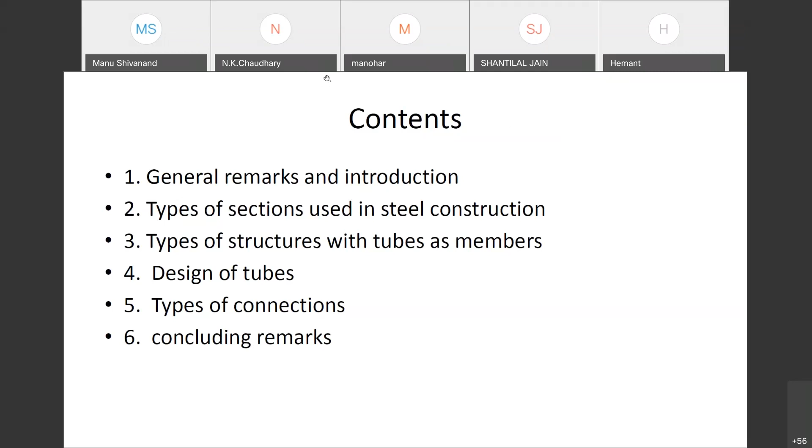In the general remarks and introduction, I have considered three subtopics: general remarks, materials of construction, and advantages and disadvantages of steel construction in tubes.

When I studied structural engineering as an undergraduate student 50 years back, we had one subject of structural design, which included steel design, RCC design, and occasionally prestressed concrete. Many of my colleagues in colleges used to keep steel design as optional, with only the submission work somehow managed, and very few studied it for the exam. That was a time when people considered steel design very difficult.

Not only that, it had very limited applications, mainly industrial sheds and similar structures. Otherwise, for most buildings, auditoriums, halls, and so on, nobody generally thought of using steel.

Steel was always considered a common area for mechanical engineers and structural civil engineers. Many times, even mechanical engineers used to do steel design and get away with normal design, while civil engineers would generally restrict themselves to concrete. Now things have changed, and mechanical engineers are almost driven out of general steel design. It is primarily the job of structural engineers with a civil background to undertake design work, whether concrete or steel construction.

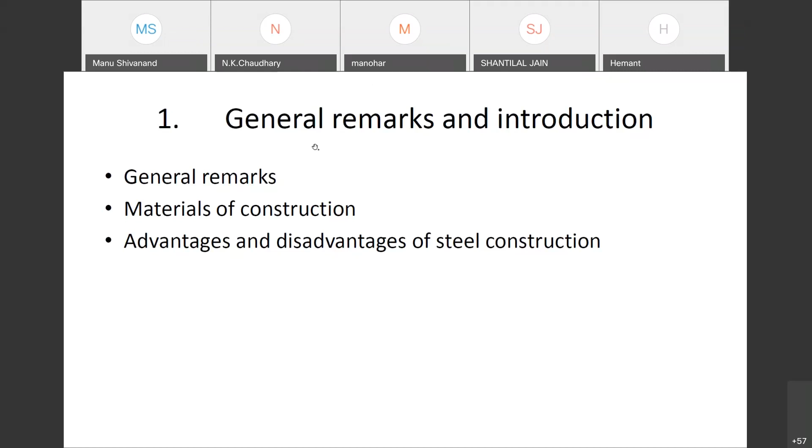Under general remarks, as far as steel sections and tube sections are concerned, they are excellent members for resisting both axial force and moment. Other types of sections are also available, like angles, channels, or tubes, but each section has its own problem. As far as tubes are concerned, their original strength is excellent and very efficient in carrying axial force as well as bending moment.

Secondly, there is a chance you can connect a member to another member, both of tubes, with direct welding possible. For other types of sections, like connecting an angle to another angle, it is very difficult to directly connect because of the legs—some legs might come in contact with the other section, but some might remain free, making the connection extremely difficult. Member-to-member connection is very difficult for other types of sections, while for tubes it is an excellent option because you can directly get enough area of contact between the two tubes to be connected.

Further, if you are using round tubes, they have a very low drag coefficient, so the wind load gets reduced as far as the member exposed area is concerned. And if it is in water or current, like a column in a creek or river, it has an excellent, very low drag coefficient, so the lateral force by wind or water current gets reduced. We see it has quite a few advantages over conventional members, either built-up members or conventional hot rolled sections.

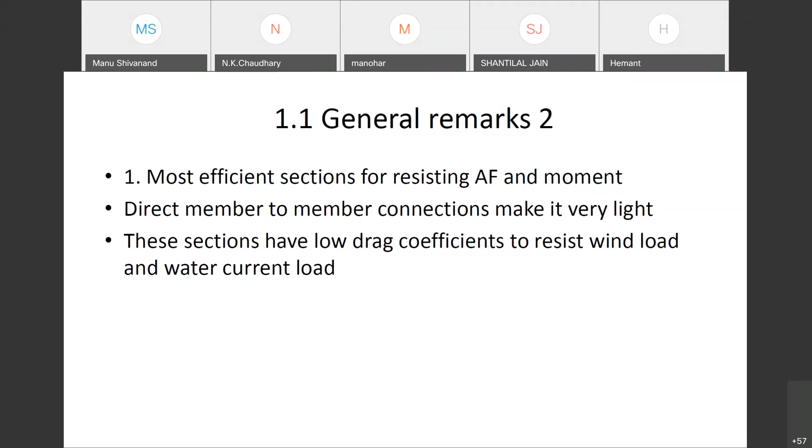Now for materials, there are various grades in steel itself. We generally have these three grades, but other higher grades are also available: YST 210 with a yield strength of 210 MPa and ultimate strength of 310. If you go for YST 240, higher properties are available. YST 310, still higher properties. You have further YST 350 or YST 460, higher grades of steel available.

We see that as you go on going for higher and higher strength materials, the capacity of the member to carry load drastically increases, and that makes the structure lighter and lighter. I think go for next.

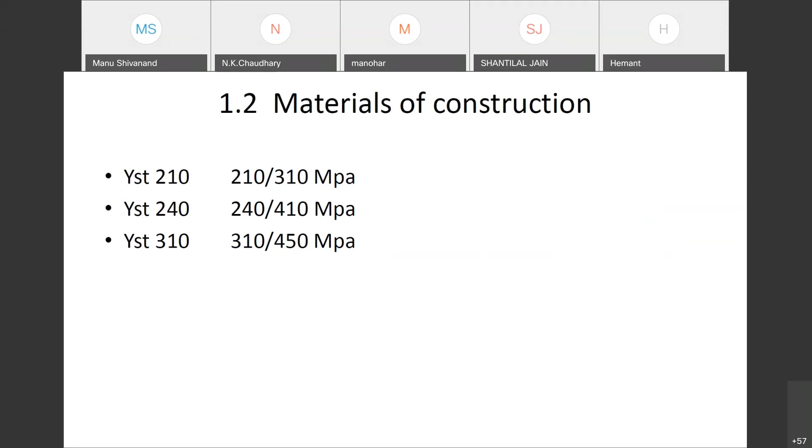Now, the basic advantage of tubular construction, using tube as a structural member, is that for such members the self-weight is extremely low compared to any other section, whether it is an I section, channel section, or built-up section. This section has a very large load carrying capacity for the same area, and as a result its self-weight gets considerably reduced compared to the same structure made up of other types of sections.

Secondly, it has excellent torsional resistance. For many open web sections, like an I section, channel section, or angle section, the torsional property is very low. They are very weak torsionally. If you have a structure where a member develops torsional moment, you have no option but to go for these closed tubes, either rectangular, square, or circular. So if there is any problem associated with torsion, you have to use tubular sections for resisting the forces there.

As far as other types of forces are concerned, most of the time the structural member, after carrying out analysis, might develop some axial force and some bending moment. If that bending moment is in one axis only, uniaxial moment, then either an I section or a channel section can be used.

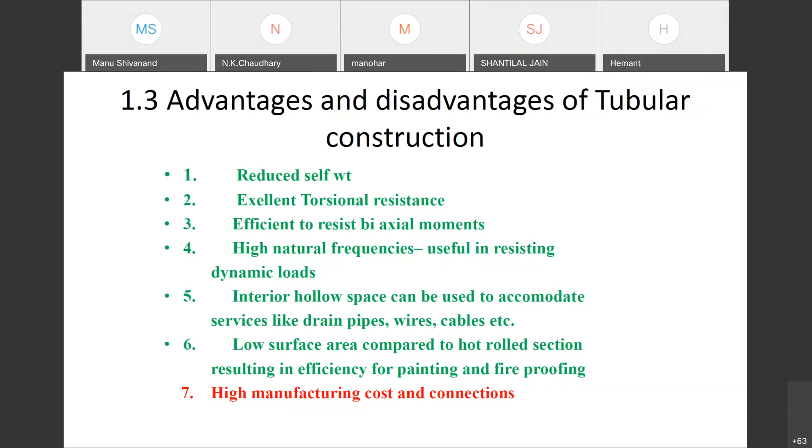Now, after having considered these general comments, let us go to the next slides.

Now I am considering the types of sections used in steel construction. With reinforced concrete, we have got a section which is made depending on the architectural requirements and so on, while for steel sections, many options are available. You have got so many types of sections. So I always find junior designers having their first query about which section to use, because he only knows that the axial force or bending moment is so and so, but shall I use a channel section, or an I section, or a tube section? There is always a free choice.

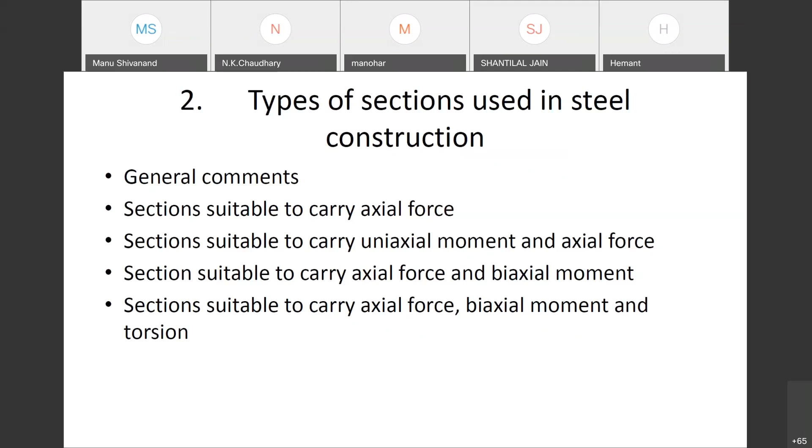So many times junior engineers or newcomers are puzzled about which section to use. We have to check carefully which section has which plus points and so on. We shall now see which sections are suitable for carrying axial force, those suitable for uniaxial moment and axial force, those that can efficiently carry axial force and biaxial moment, and sections that can carry axial force, biaxial moment, and torsion - whether a section is ideally suited for such demands or not.

So now we see that the sections available are vast in number. There are various sizes and thicknesses available. We have got an I section, a channel section, the T section, the angle section, equal or unequal. Then we have sections with bulb type projections. We have round tubes, square or rectangular tubes, and plain plates available directly for making any section through welding and so on.

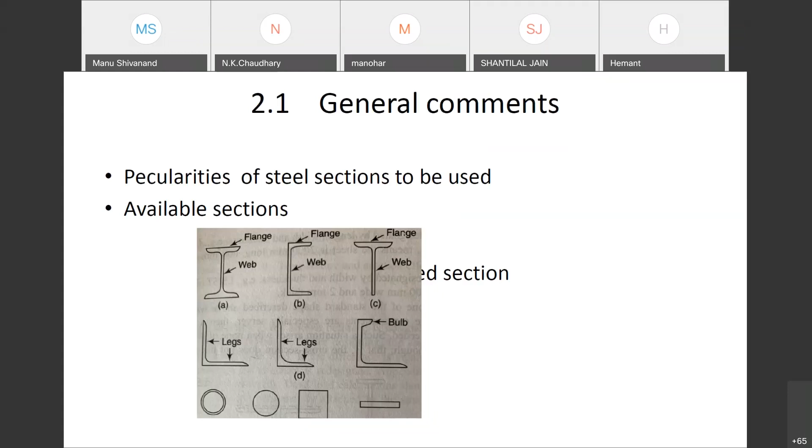Now we have also got built-up sections. That is, in addition to what you get in hot rolled, you can add plates to it and see whether your demand is met. Then we have cold formed sections, which are very thin sections. They are also used in many applications with the obvious advantages of lightweight and so on. So these various options are available, and one has to judiciously select a section and see whether it meets the requirement or not.

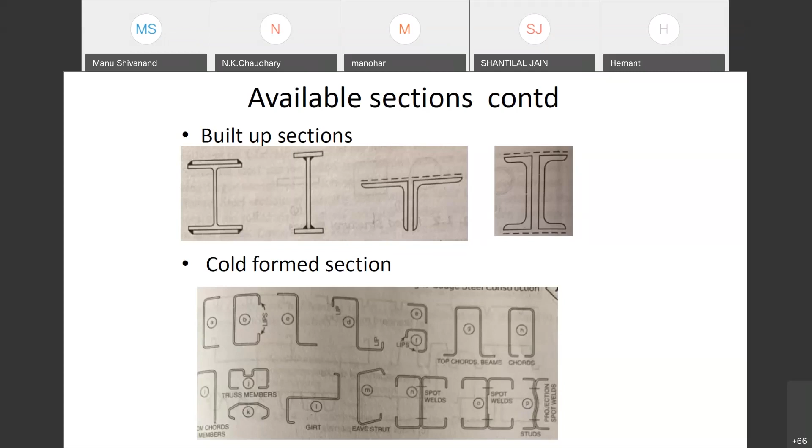Now, when you consider a member expected to carry only axial force, like in trusses, we see that angle sections are an option. You can use single angle or double angle, or a channel section, which is also strong or efficient enough to carry axial force. We have an I section or H section, but it is difficult to connect them in a truss, so generally they are not used unless you can think of suitable connections. Round and rectangular tubes are also used for making trusses. So if members primarily carry axial force, all these options can be considered, but each time you have to see what kind of connection you can think of.

As far as angle section is concerned, it has about 2 legs. The result is, if you connect an angle to a gusset plate with only one leg connected, it becomes more inefficient, because its load carrying capacity gets reduced due to the eccentric connection. So each time you think of a connection, it immediately puts a bar on the load carrying capacity of the members.

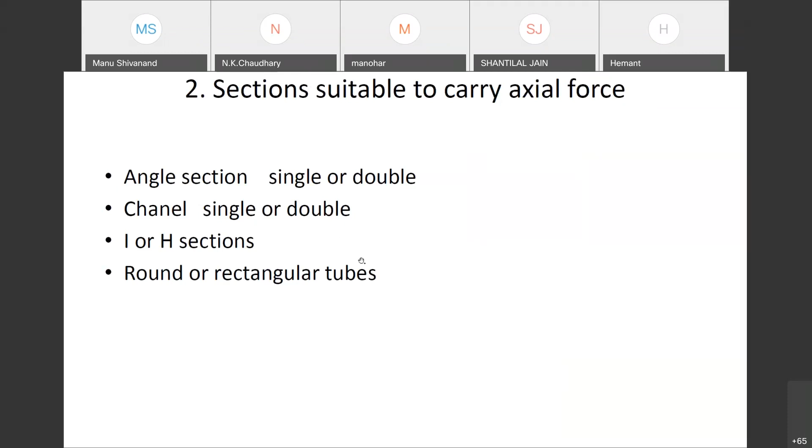Now if you consider a structure where members carry axial force and uniaxial moment, like a plane frame, you can use a channel section, either single or double built-up sections, or I sections because they have excellent moment of inertia about one axis, or round, rectangular, or square tubes, which are also good in resisting axial force as well as bending moment.

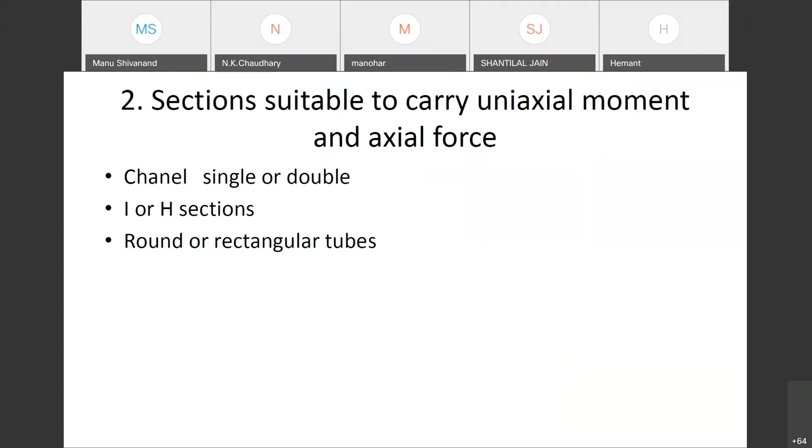If you have a three-dimensional structure where members carry axial force and biaxial moment, you can go for I sections or H sections, which have reasonably comparable properties for bending about both axes, or round, rectangular, or square tubes - they are also ideally suited. So for a structure where members develop axial force and biaxial moment, you need to consider only two options: either an I or H section, or a round or rectangular tube, or built-up sections in these shapes. You can even go for channels built up, so that there are enough properties in both directions, and these sections can also be preferred.

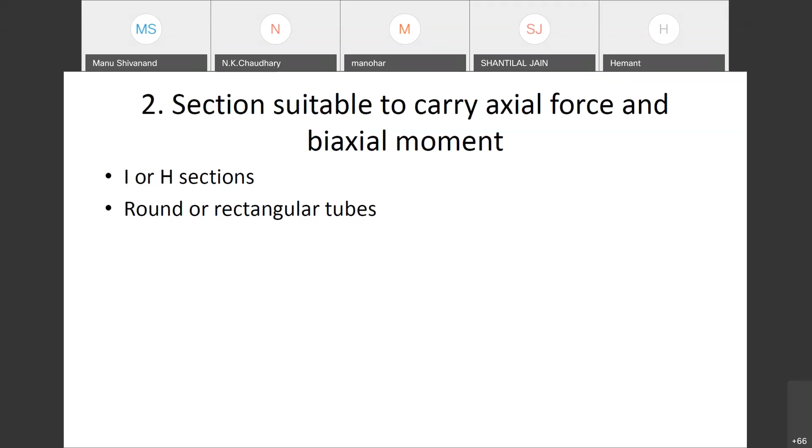Well, if you have a structure where the members develop axial force, biaxial moment, and torsion, then the only choice is to go for either a round tube or a rectangular or square tube. Because when you are to deal with torsion, open sections like an I-section, channel, or built-up sections are out of question. An angle is out of question because it doesn't have enough torsional strength at all. It is very feeble for torsional resistance and so on.

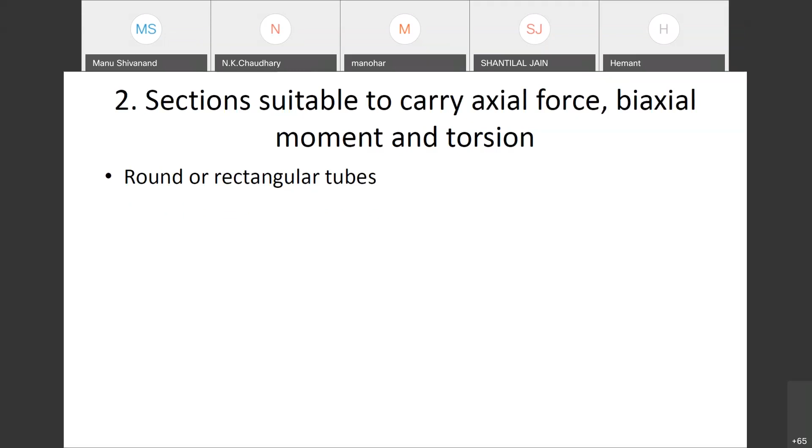Now, when we consider all these plus and minus points, let us now consider the applications where you can directly select a tube as a primary member and plan the structure accordingly, with suitable connectors. The first type of structure that comes to mind is a space frame with either a 2-layer or 3-layer space frame with ball connectors, plate connectors, or special connectors.

In a space frame type structure, the primary members are carrying only axial load, and in that case you can definitely use ball connectors or plate connectors. Then you have large span trusses, where again you can consider using tubes but with connectors which are specially designed or specially made.

Then you have spherical domes or pyramidal structures, or supporting structures for fabric roofs. For a fabric roof you need a massive structural system on which the fabric is laid, and the supporting structure has to carry all the wind load effects coming from the fabric. Many stadia, or structures now seen at toll plazas, have fabric roofs provided in a large way, and there the supporting structure is many times made up of either round tubes, square tubes, or rectangular tubes.

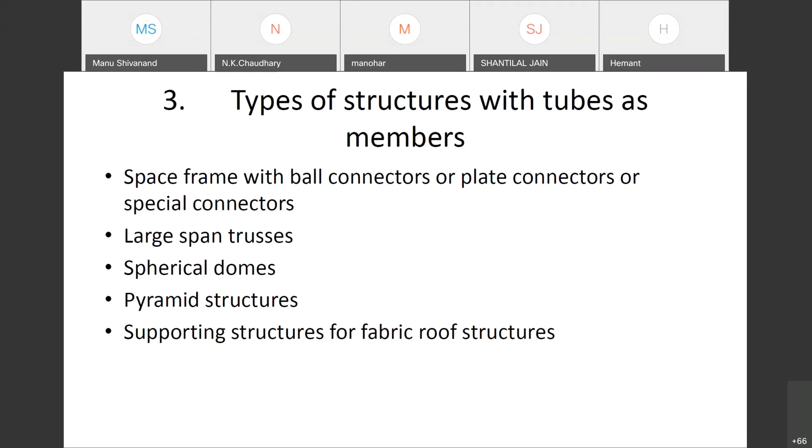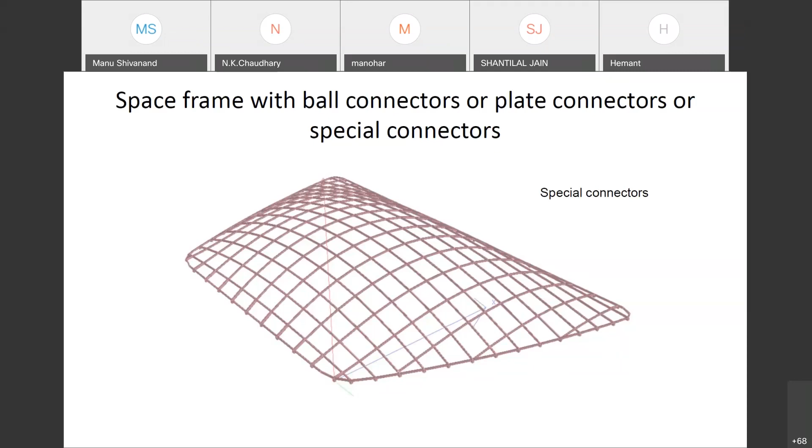Here particularly we have used cylindrical connectors. With this toll plaza type structure, which is a double layer space frame, we generally use ball connectors because these members primarily carry axial force, and for axial force you need only a simple connector where a single bolt is used to transfer forces from one member to the other through the joint.

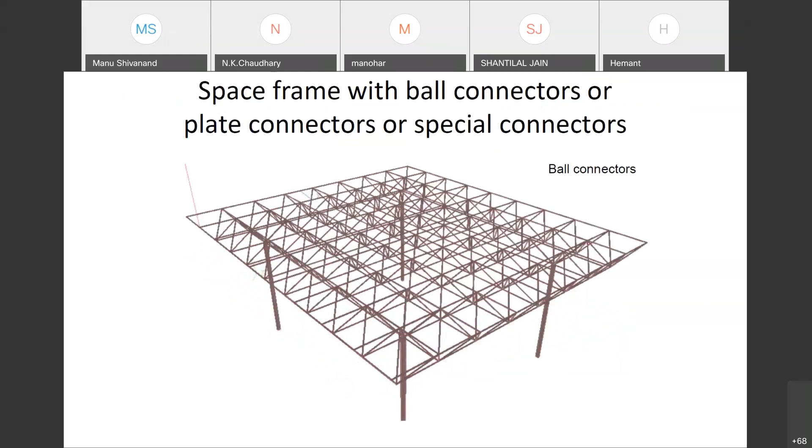Now this is a space frame again, but with plate connectors. Instead of going for ball connectors, because a ball connector needs special secondary hardware and the balls have to be specially made with a lot of accuracy, the other option is to go for plate connectors, where the tubes are crimped at the ends and the connection is made to a plate connector through bolts. So the bolts in this case are in shear, while in the earlier option with ball connectors, the bolts are either in tension or compression.

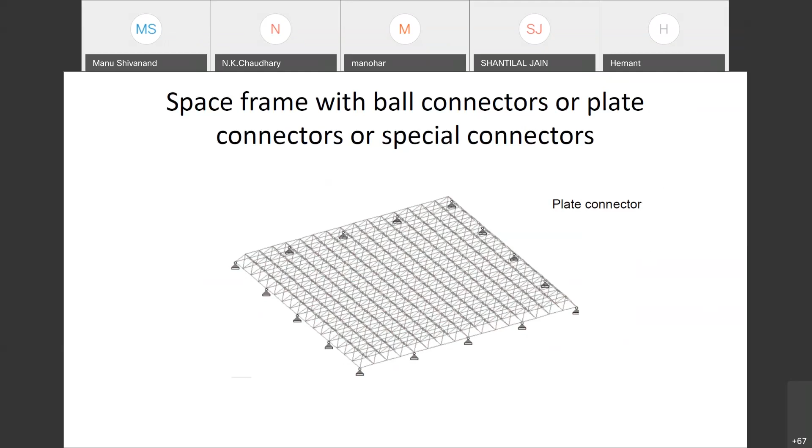This is one dome structure of about 17-meter diameter that was designed, where again we have used ball connectors for its connections. The dome has the property that most of the members carry only axial force, as a result of which ball connectors are ideally suited for connecting members at the joints. Such geometry can be easily conceived and implemented by properly drilling the holes at the node at specific angles, and accordingly connections are made.

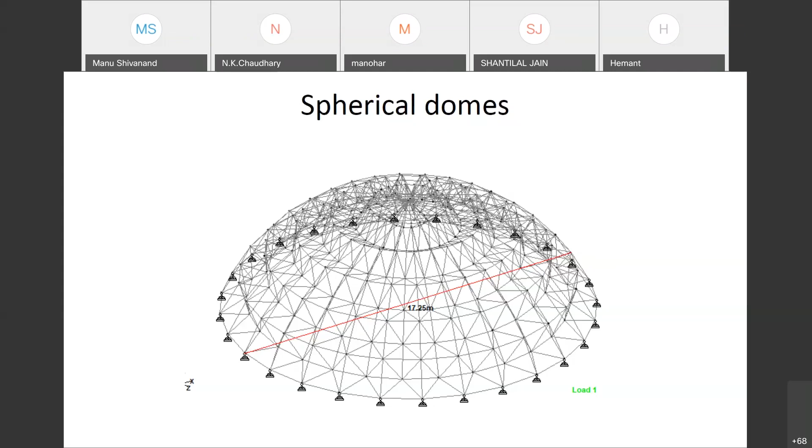This is again a pyramid type structure where tubes are used, but here instead of using ball connectors or plate connectors, direct welding was done for member to member, and accordingly the entire structure was made by only welding member to member connections. So all the members are tubes with required thickness and so on.

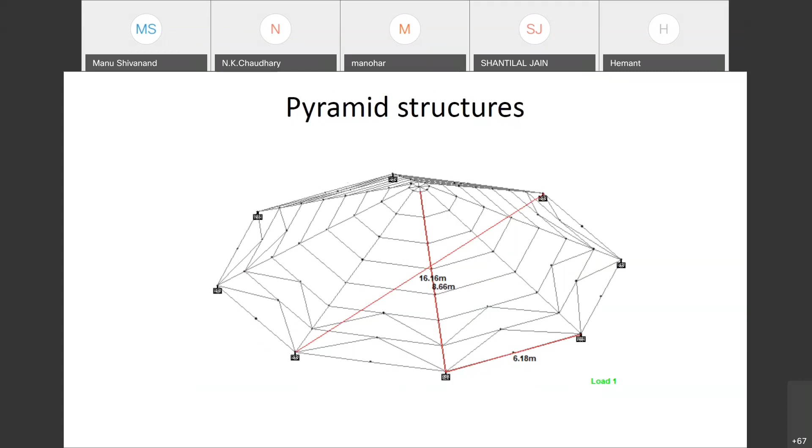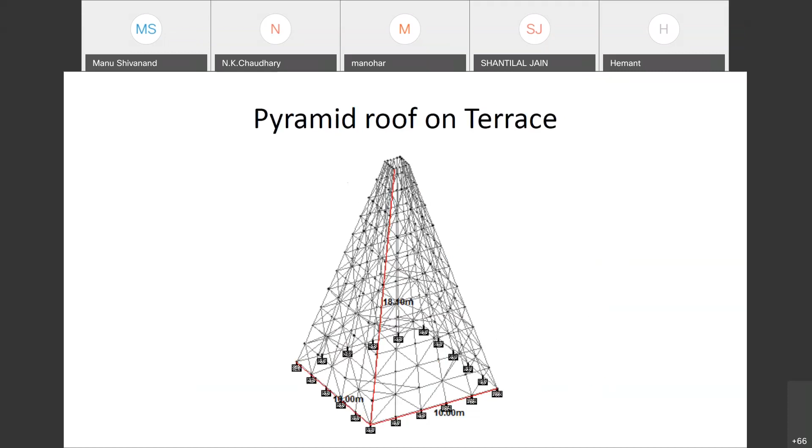This is also a pyramid structure where again a massive height was given for the pyramid. About 18 meters was the inclined length and the base dimension was 10 meters by 10 meters. So a very steep slope was accorded, but the sections used were all tube sections and they were all welded to each other.

Now this was one massive structure for the Commonwealth Games, which were held in Delhi, I think either in 2008 or 2009. This was an elliptical type fabric structure where the major axis was about 108 meters and the minor axis was about 60 meters, 53 meters, and so on. It was made up of round tubes.

So we have used tubes of diameter 1 meter and almost 10 millimeter thickness. The columns and the ellipse were all made up of 1 meter diameter, while other members were made up of about 800 millimeter diameter, and they were all welded to each other.

So we had to develop special connections, moment connections, where through these tubes or pipes, slots were made and plates were inserted into them so that full moment capacity of the section is mobilized. Developing the connections was a major challenge because the spans were massive, and it required several splices through the length.

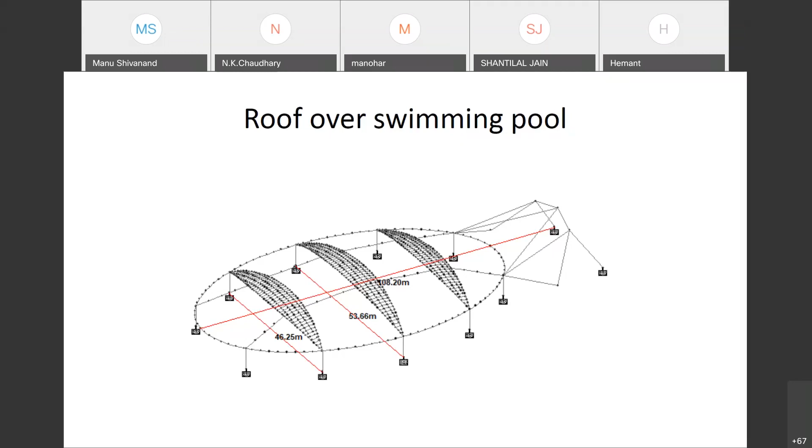At the junction we had to properly connect the column as well as the ellipse in the horizontal plane and the inclined member over there. So the geometry was very tricky, and the connection at this point was totally developed through plates which were inserted inside the pipes and so on.

Now when you design the tubes, as far as member design is concerned, for a tube the design is extremely simple because when you have a specific type of force, its load carrying capacity is well understood. So when considering a tube carrying axial force or shear force, you need only consider the force developed, either axial or shear, upon the cross-sectional area which is resisting. Once you have the permissible stress depending on its L by R ratio, the area required can easily be arrived at by trial and error.

So the design of tube for axial force is extremely simple. It is just load upon permissible stress that directly gives you the required section. As far as bending moment is concerned, again on the same line, you have got a well-defined section with its section modulus also known. Accordingly, you can directly take the bending stress almost to full capacity and then design the section for its applied moment.

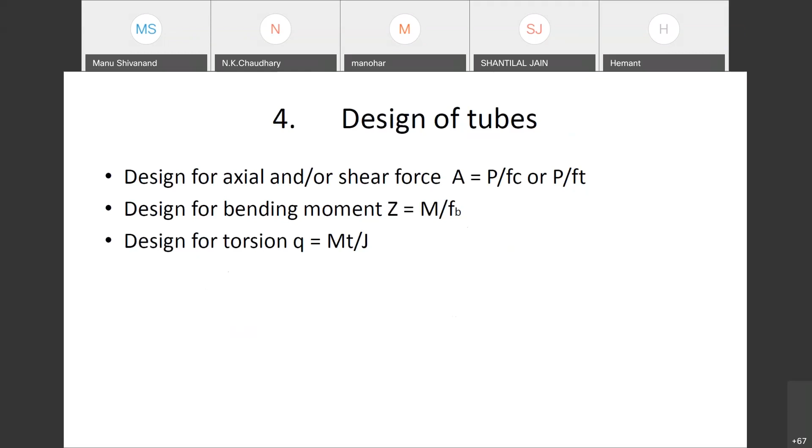While for torsional moment, this section has got excellent torsional resistance. So you have got a simple torsional formula: the moment multiplied by the distance of the section from the center of rotation, upon the torsional modulus, that is J. That gives you the shear stress, and that shear stress has got a permissible value from the material you are using. Accordingly, designing for torsion is also not a difficult task at all, because the torsional property, the polar moment of inertia or J, is readily available, and directly you can consider the design in this simple fashion.

I think is my time getting up?

Now, as far as connections are concerned, we have got various types available for connecting tube to tube. Out of that, solid or hollow ball connectors connect members carrying primarily axial force, which I will show you in a minute. Then we have got cylindrical connectors carrying axial force and uniaxial moment, which we have recently used for one of the projects. Then we have got plate connectors to connect members carrying axial force, that space frame situation I will indicate to you.

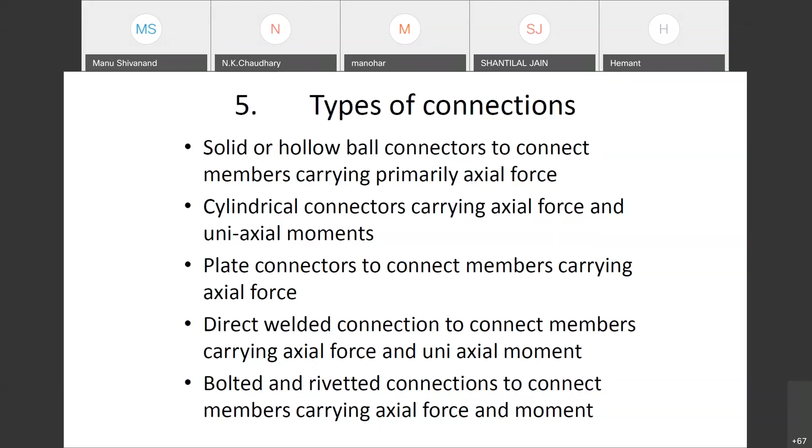Then we have got directly welded connections from member to member. For tubes, it is possible to directly weld one tube to the other, and there is no harm at all since enough welding area is available. Or you have got the bolted and riveted connections to connect members carrying axial force and moment, similar to the cylindrical connector which I have shown.

Okay, now this is one space frame that I want to show. It is a two-layer space frame with branches coming from the column. So there is a support from the bottom to the bottom grid, those four branches which are taken from the column, and then at those locations they are connected to the ball connector.

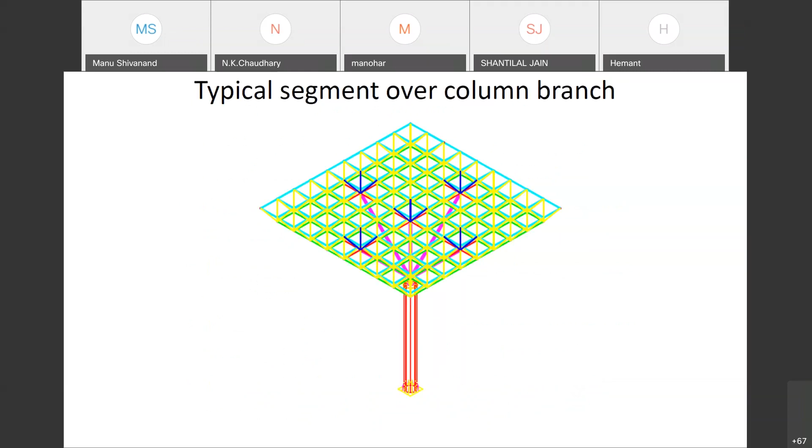The ends are made solid by welding a solid rod inside it, whose diameter is equal to the internal diameter of the tube. About 50 to 60 millimeter length of the solid cylinder is welded inside. A hole is drilled into it, there is threading in that, and a bolt is connected through that drilled hole, finally going to the connector.

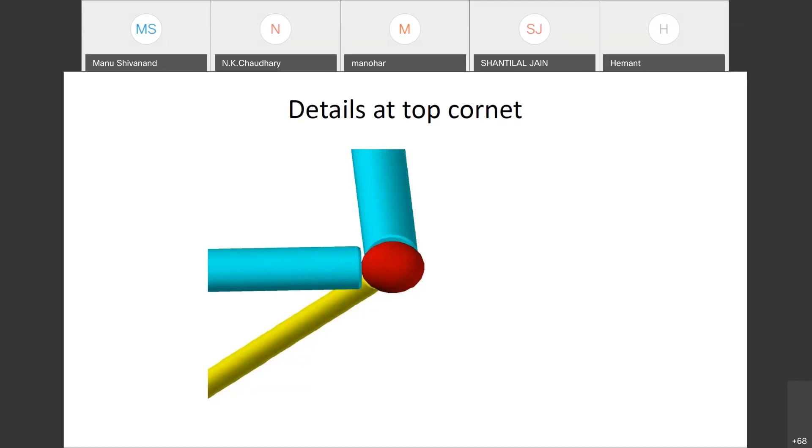So the connector can be a solid ball or a hollow ball. If it is a solid ball, then you need some gap between the connector and the member, so that the bolt can be easily driven inside the node and the connection is made. Now this connection is ideally suited when you have got members carrying primarily axial force, because the bolt can carry only axial force in this particular case.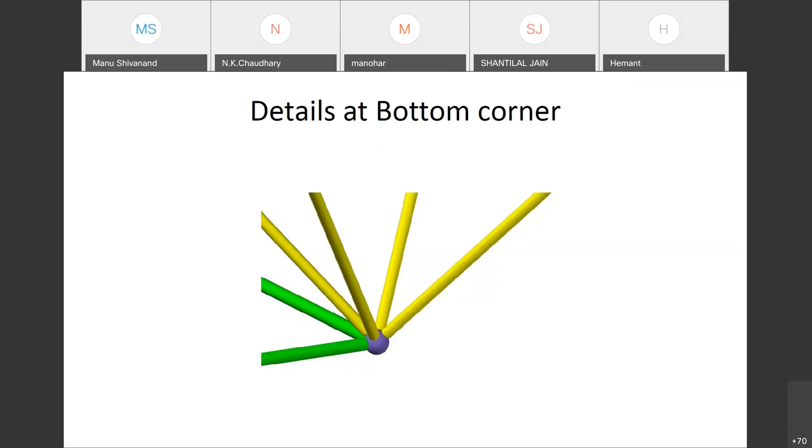Similarly, you have got various other angles coming here. A T section is made where you have got three members in one plane, and then you have got diagonals connected. I think the connection arrangement is the same; the angles at which you have to drill the hole only change as per the configuration.

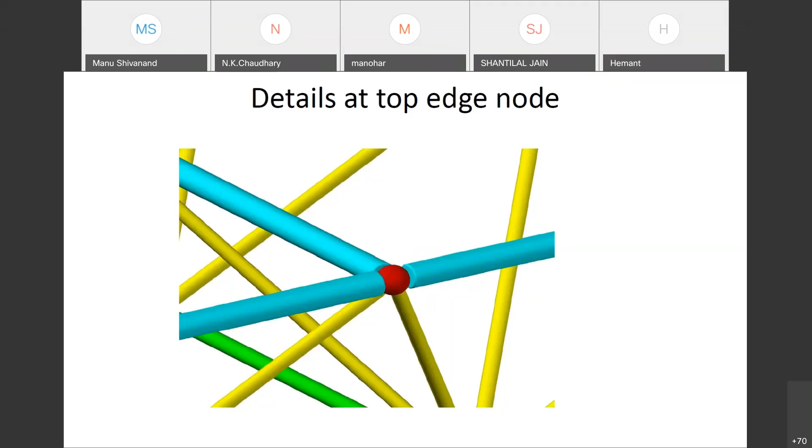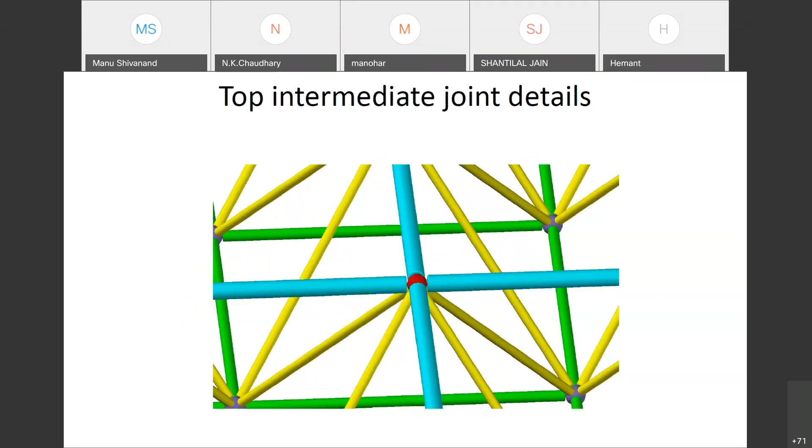I think this you can skip. It is going to the extreme end where you have got four members in a horizontal plane and four diagonals connecting it to the members in the other layer. Okay, go for next. Similar situation.

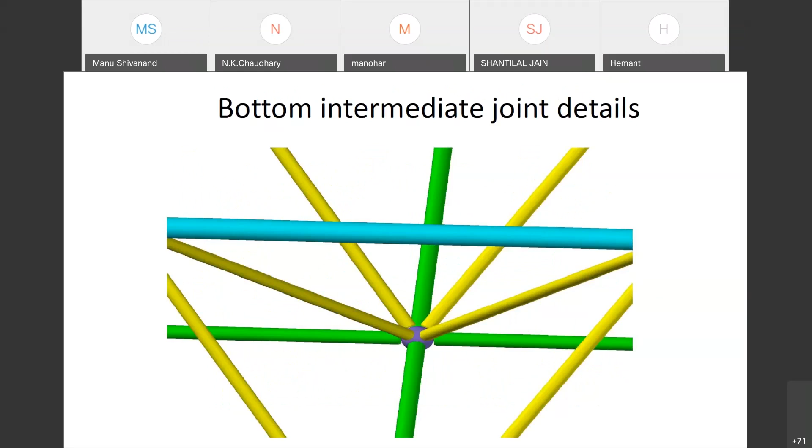This is what I have told you, that you can take a column from below, and then you have got four members in horizontal plane, four in diagonal, and a column below. So you can connect 9 or even 10 members in certain situations, and there is no difficulty at all. Only thing is you need precision in drilling the hole and connecting it in a proper fashion.

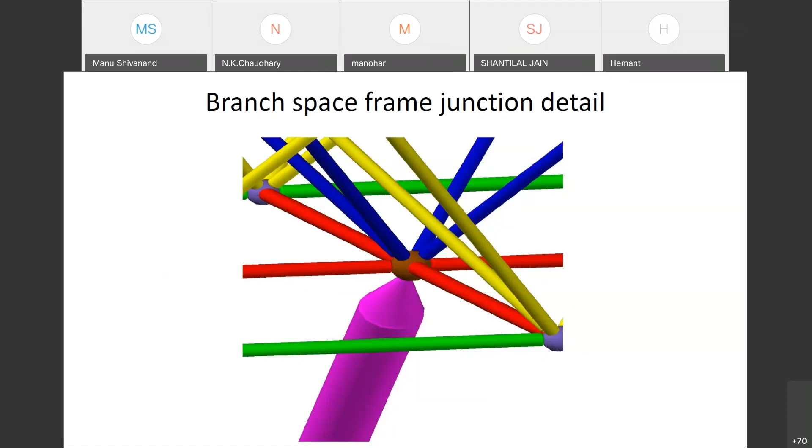Okay, I think this is similar to what you saw. Go for next.

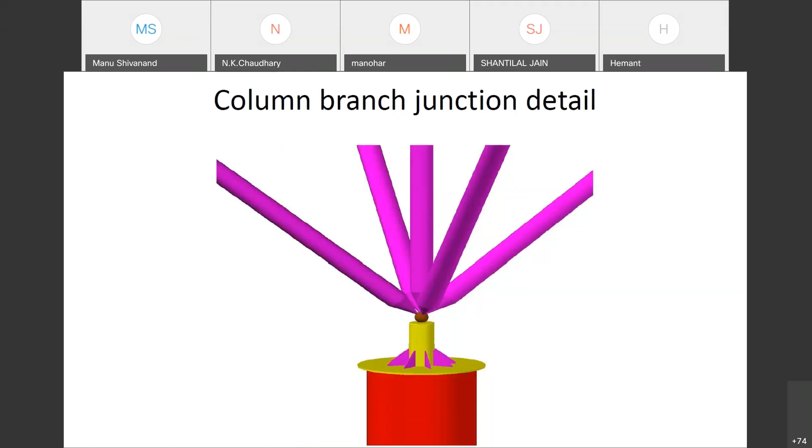Now, when you are connecting it to a solid or hollow cylinder, a hollow node, that is a spherical ball, you have got a tube. At the end of the tube, a solid cylinder or solid rod is welded inside. So if you have got a 60 mm diameter tube with outer diameter 60 and inner diameter say 52 mm, then you take a solid cylinder of 52 mm diameter, put it inside about 50 to 60 millimeters, weld it on the surface, drill a hole through it, and connect it with the bolt.

So you have got a bolt which is driven, which many times is put inside the tube at the beginning itself, and nuts are placed at this point, and later on when you want to connect it to the node, these nuts are rotated so that the bolt goes inside the node, and then you can connect it to a solid node. If you have got a hollow node, the situation is similar, except that in a hollow node, the tightening is done from inside the node.

So you can directly take the bolt, put it inside the node, and drive it and turn it inside the member itself. So you have got this solid portion which is called the prop. Now that is drilled with threading at its surface, and accordingly the bolt is engaged through the threads. So the axial force is directly transmitted through the threading arrangement.

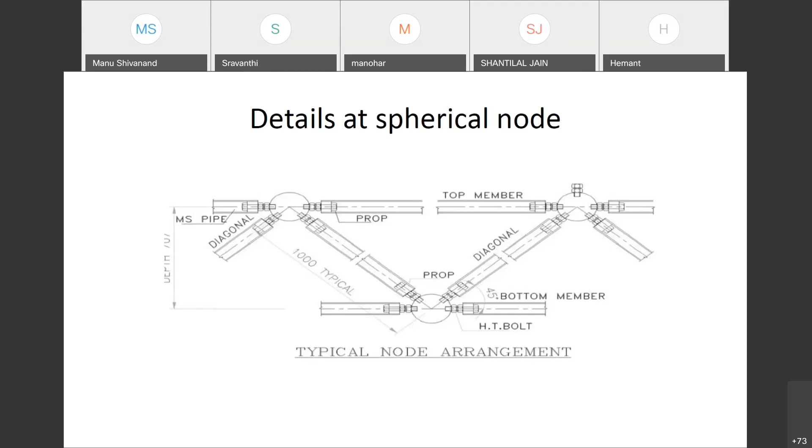This arrangement, which I have shown you, which we have recently used for one of our projects, where I showed you that odd-shaped structure, where the members were carrying axial load as well as uniaxial moment. The spherical node which I showed you is ideally suited because it is only connected by one bolt, so it can take only axial force. While in this arrangement, we require a member to be connected to the cylinder, but it had axial force and a bending moment also. So for that purpose, we have got this hollow cylinder.

So this hollow cylinder of required length is taken, and then two holes are drilled on its surface. For this rectangular tube, we have again got that solid section which is welded inside, and then it is threaded all along its length, while the bolts are driven in from the inside. That is, bolts are put inside the connector so that they get engaged to the member at its prop. So you have got two bolts connected.

So those two bolts take axial force also, and because it is subjected to moment, one bolt develops tension, the other develops compression. So with the couple formed by the forces in the bolts, it is able to resist the bending moment also. With the arrangement of two bolts in one vertical plane, it is able to take axial force, which is same in both bolts, while due to bending moment, in one bolt the axial force gets reduced, and in the other it gets increased. So if the axial force is tensile, the tensile force will increase in one bolt, while it will decrease in the other bolt, and so on. So this is the way the hollow cylinders are used to connect members which carry axial load as well as uniaxial moment.

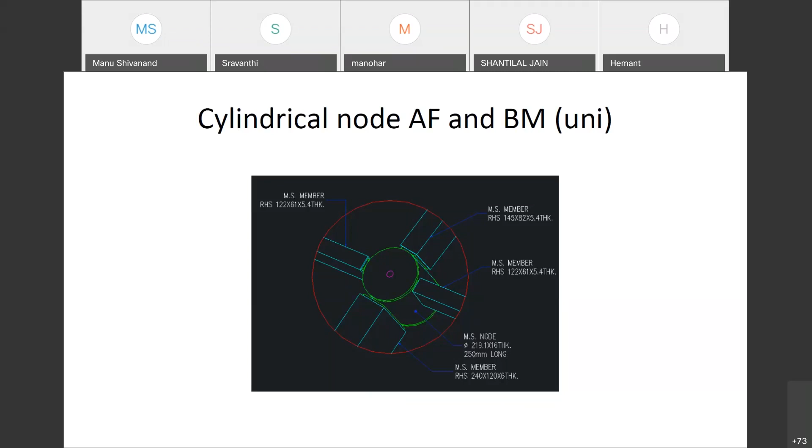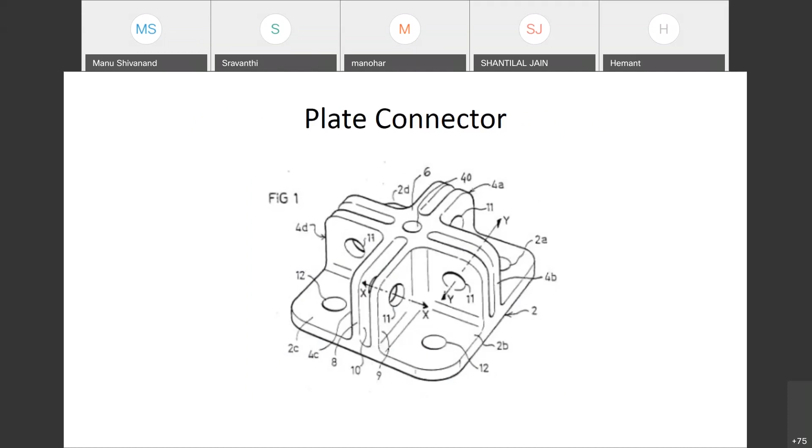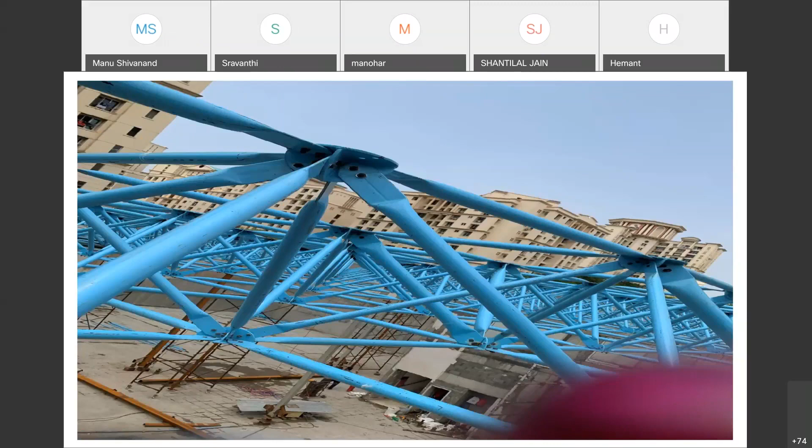It is made out of round tubes, while round tubes are flattened at the ends for the required distance so that two bolts can be connected to it. So we have got this plate connector having a plate in one plane, with two additional plates welded to it, forming a plate connector so that four diagonals can be connected to it and four horizontal members can be connected to it. I think, can you go to the next slide? I will show you the further connection.

Okay, now here you can see that you have got a round plate, and then two half-round plates are welded to it, one going this way and the other going that way. So the other plate is made in two parts, one up to here and the other going from the other end, so that now you have got four diagonal members connected to these semi-round plates, and for the full round plate, four horizontal members can be connected.

It is connected by two bolts, and those bolts are generally in single shear, so the diameter of the bolt can be decided depending upon the force in the member and so on. So this is ideally suited for members carrying axial force itself; for bending moment, it is not much of use. If it is a secondary bending moment, a very small value, then it can take care of that, but if it is primarily axial force, then this is ideally suited. You don't need precise geometry like the ball connector, where the ball connector needs precision — the drill is to be done at a specific angle, and accordingly very precise threading is to be done on that. Well, this is relatively a very simple technology.

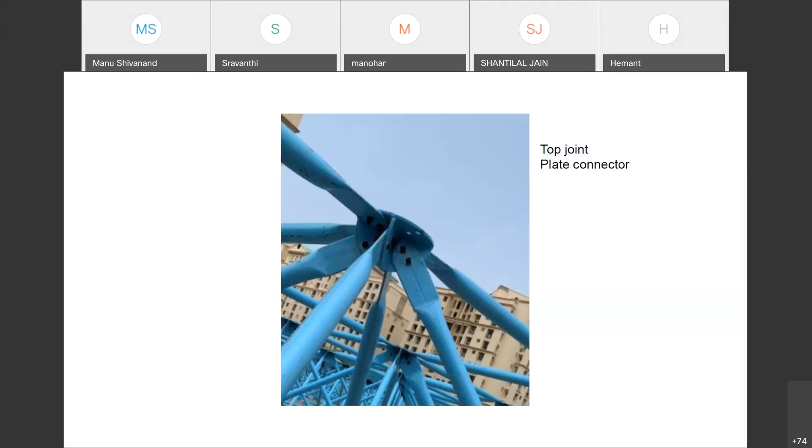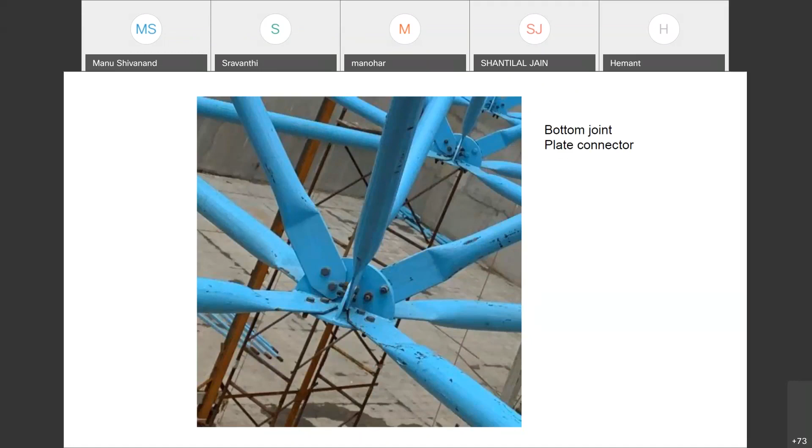Only thing is, in such cases, you have to take precaution that local bending does not occur. So if your section has got very thin plate, then this kind of welding is very difficult, and it can lead to local failure.

When you have got a round tube, you have to have precise cutting of the member, because the member should be perfectly in contact with the other member. So profile cutting is required, and with profile cutting you can again weld member to member, but these should be secondary members with reasonably small force. Only then such kind of connections are made.

If the forces are large, then you need to strengthen the parent member by providing additional plates of whatever thickness, and then directly do the welding. So you need to weld onto this member another plate which is again round, and to that plate you weld these members and so on. That is, I think, as far as the connection between member to member in a direct fashion is concerned.

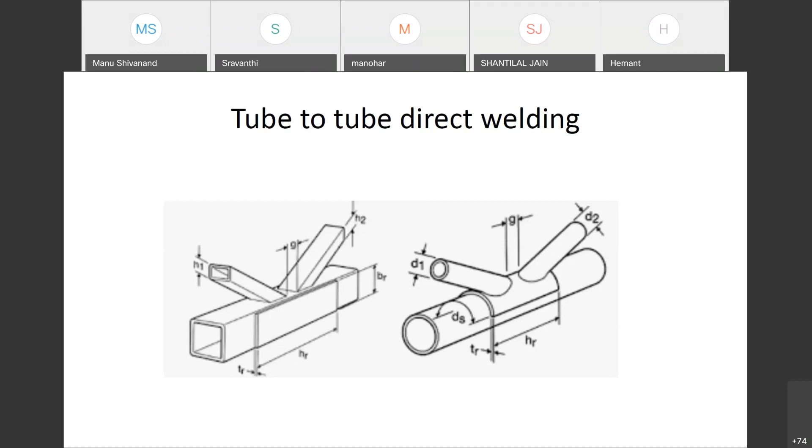Now this saves a lot in the weight of the gusset plates and so on, so such structures become reasonably light.

Gadgil sir, can you just unmute yourself and start the slide again? Yeah, thank you very much. No sir, you can conclude. I had to unmute everybody because there was slight disturbance, so you can just finish your last slides. Okay, I think now let's go for the last slide only. Next.

Thank you very much to ISSE and also to the Tatas who have given me this excellent opportunity to present my work and talk about some of the basic concepts involved in selecting the sections. In steel construction, the main problem is always the connection, so you have to always think of the connections as to how you can connect different members, and only then go for proper choice of the members and so on. Thank you very much.

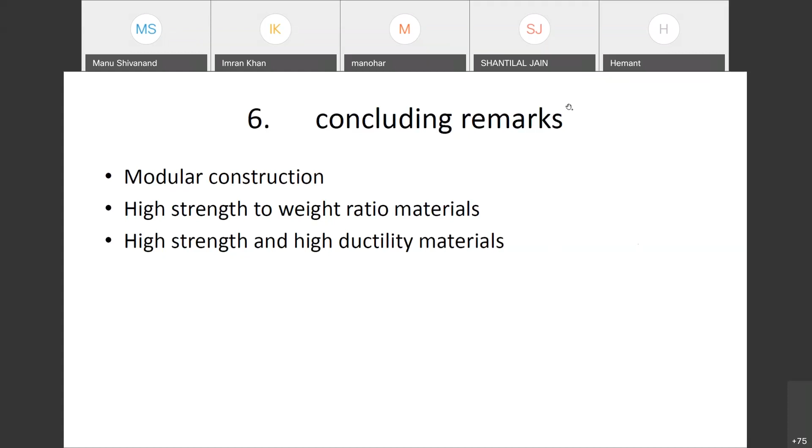Thank you, sir. Manohar sir, thank you so much. There was no problem with exceeding the time - I'm sure this is something everybody actually wanted to see and understand. You could see it from the number of questions coming in. As long as there's a lot of knowledge being shared, I don't think there's any problem with the time being spent. Thank you so much, sir, once again for being part of this session. Being a professor, I always wait for the bell to ring to conclude my lecture, and that bell was not ringing, so I continued. Sorry. We didn't want the bell to ring because there were too many interesting things you were talking about. Thank you so much, sir, again.

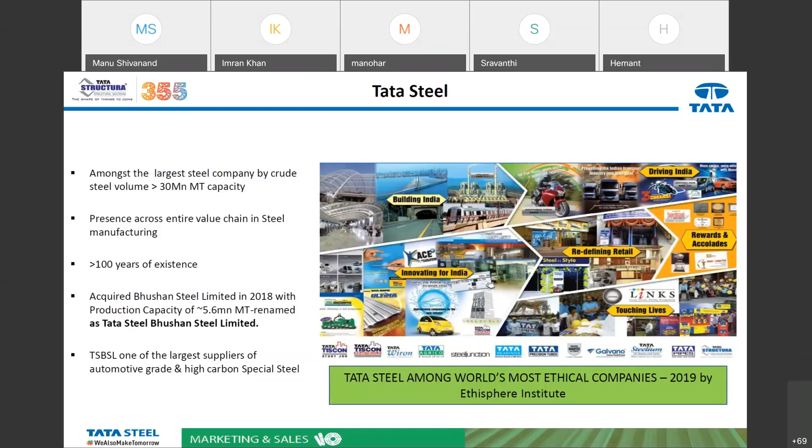Tata Steel is today probably one of the largest steel companies, not just in India but also in the world, with more than 30 million tons of capacity. In the last 2 years, we made an acquisition of Bhushan Steel, whereby we increased our capacity by another 6 million tons. Today we are the third largest tuber in India with a market share of 9%, and we have a manufacturing capability of close to 1.3 million tons per annum.

There are a lot of new investments that the government of India has announced, especially with airports. There are about 100 new airports that government of India is planning, including modernization of existing ones. Railways too—in Bombay itself, stations like Bandra and CST are going to be redeveloped. A station like Habibganj in Bhopal shows how well the design has come out—it looks absolutely like a world-class structure, nobody would call it a railway station anymore, they'd rather call it an airport.

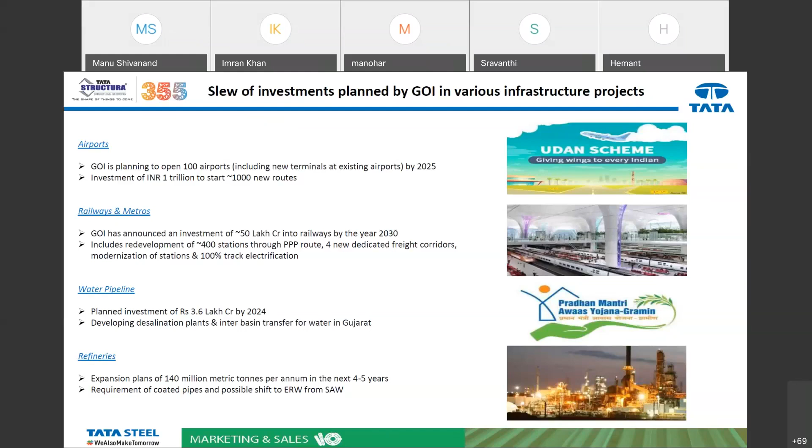The Pradhan Mantri Awas Yojana Gramin scheme also has a lot of focus coming on the water pipeline segment, and refineries is another segment we see growth in. There are members today from Toyo attending this meeting who have been very much involved, in addition to other good customers like Tata Projects, in refineries, and we see a lot of expansion coming here as well.

YST 355 high strength hollow sections—Gadgil sir had mentioned the 310, and also spoken about 355 and 450. This is something we've launched and come out with, and we can also supply grades in E410 if required.

Various segments that we generally cater to are industrial, infrastructure, housing, commercial, and general engineering. Gadgil sir was mentioning how good hollow sections are with respect to torsion. General engineering has started to realize that where they were using channels and I-sections, now they've actually started using hollow sections. These are segments which traditionally have not used this, but now are witnessing things happening in the construction industry, and because of the material capability, they are trying to implement it for their requirements as well.

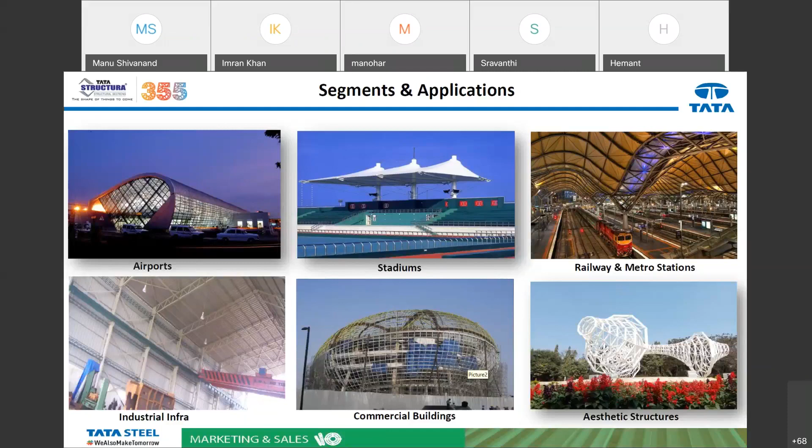I want to point out the charka, which most of you would have passed by—they had actually used our tubes for it. A similar structure has now been built in Bhubaneswar, and a new diamond structure in Jamshedpur, which I would really request all of you to take a look at. It's amazing what architects and designers can actually do with their creativity, how much they can aspire, and how much they can use this material or tubes as a product.

In YST 355, just like what Gadgil sir was mentioning earlier with TMT, the standard was FE415, we moved to FE500D, then to FE600. The idea is to give you a higher strength material so your overall steel consumption comes down, and thereby your overall costs also. That's the same ideology with which we are coming up with 355, and like I told you, we can produce 410 also, and even a 490 if required.

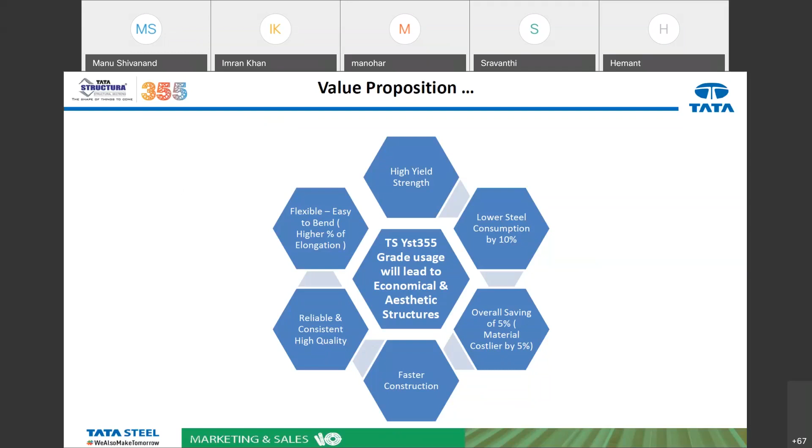Neeraj sir had initially mentioned that with the acquisition of Bhushan, at one point we were restricted in our capability up to 10 thickness. But today we can actually supply circular sections in 610 OD up to 16, as seen in the Sabarmati flyover by members from STUP, where they've used really huge circular sections. These used to be made through different equipment using plates, but now these sections are actually available ready-made, so you can use them for various requirements.

Similarly, in square hollow sections, we've come out with 400 into 400 into 16, and in rectangular we can do up to 400 into 200 into 16. These are the sections that we've now come out with and which are readily available for your consumption.

A lot of talk has been generated on sustainability and carbon emissions. How can we get a better green building certificate or LEED certification? At one point, we'd only get requirements asking what is your recyclable content, what is the logistics, how much distance raw material traveled up to production. These were the typical questions asked.

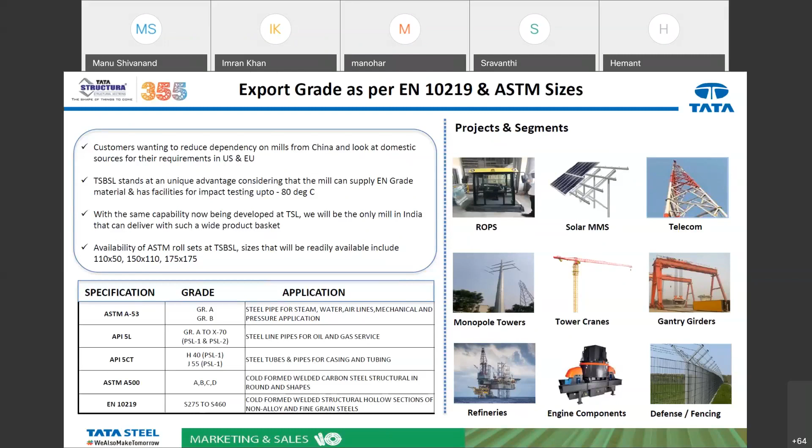In addition to sections available as per European specifications, we also have ASTM sizes. Typically you'd be restricted to sections like 150x150 or 180x180, but now we have roll sets like 175x175, 140x140, typically used abroad for applications you've not seen, like 110 into 50 or 150 into 110. A lot of airports have started using this for their facade requirement. So this is one of the new grades we can now supply.

We can convert the 3D model into shop floor drawings directly, giving you an accuracy of up to 5mm, so you're able to connect it to your plates properly. You're not dependent on any manual labor, and your project gets executed at a much faster pace.

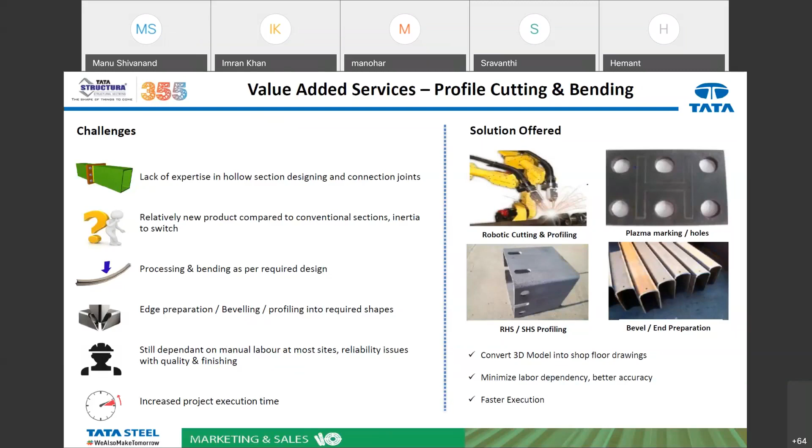Like I mentioned, 400 into 400, 400 into 200, and 610 OD - people have now started looking at using these for hoarding requirements, like large signboards. You'd have probably gone to Hyderabad airport and seen those huge, gigantic columns, but those had to be imported at one point. Today we give you the flexibility of offering 400 sections up to 16mm.

Like iconic projects like the IICC Dwarka, one of the biggest exhibition centers in the country, they've used more than 300 tons of 400 into 200.

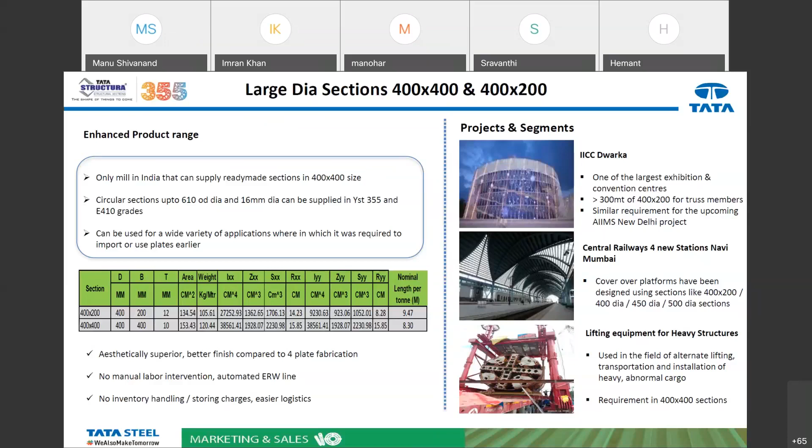In the upcoming railway stations, the way they've used their covers over platforms with sections like 400 OD and 500 OD, it is amazing what can be achieved using these circular sections, because you're not dependent on fabricating any plates anymore. It's more about the aesthetic prowess you get using these sections. There's no manual labor, no plate fabrication involved - it's much cleaner and more aesthetic than what you generally get doing it manually. This is one area we would request all of you to explore.

Steel inherently is not the best for fire resistance. Bringing concrete in can help mitigate that issue. The advantage of putting concrete and steel together is that it can reduce construction time at a much faster rate, and your steel consumption reduces.

Floor space area for apartments today is a very big problem. You go to buy an apartment, they tell you a particular square feet area, but you end up getting something else. Today you're able to design much smaller columns, thereby increasing that livable or usable floor area. The overall cost saving is also to the tune of around 10 to 20 percent that you can achieve by using concrete. So that was just a small brief from my side.

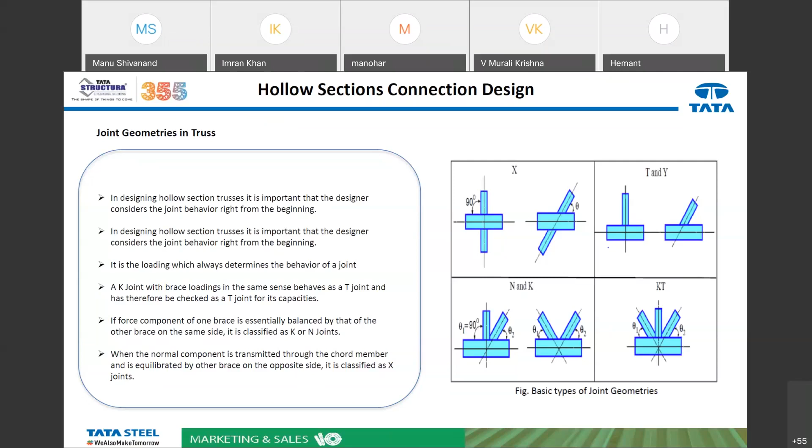Now we will come back to what are the types of joints and what are the failure modes. Then you will understand why I was telling that one. These are the basic types of joint connections - either X or T or K, N type. Next slide, please.

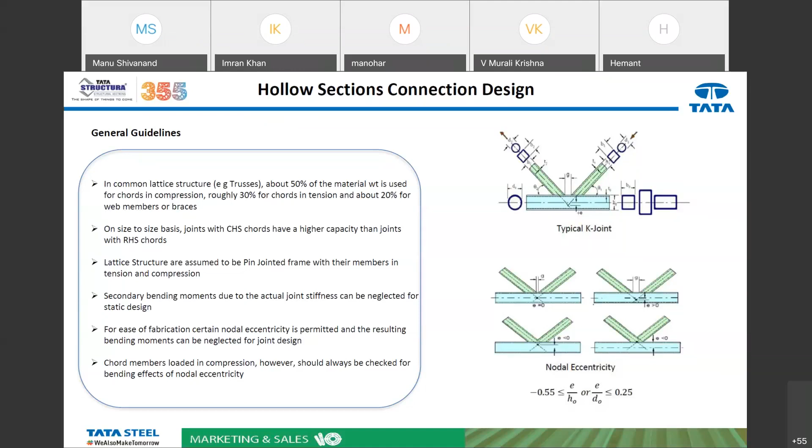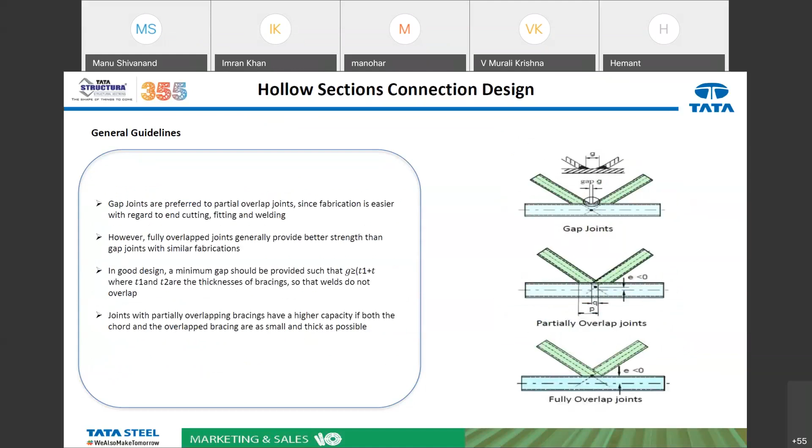Next slide. This is what I have discussed - partially overlapped gap joints and fully overlapped gap joints. Next, failure modes, next slide.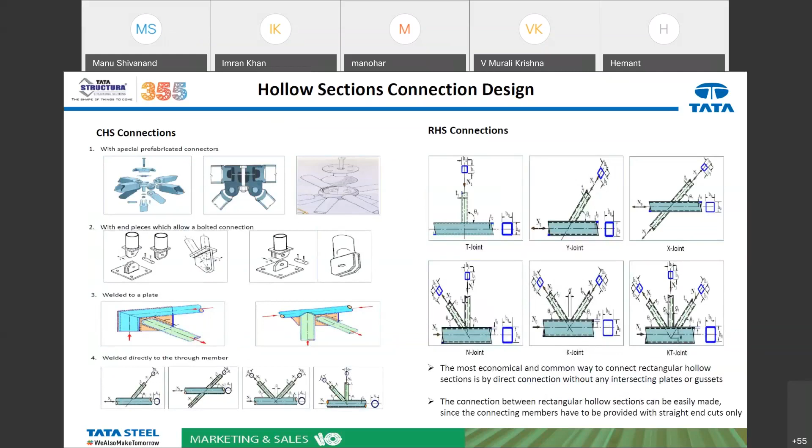If you are not following that, this type of failure will happen: chord local buckling. Your bracing member is much stronger, but your chord face is not sufficient to take that bracing member load. That's why chord failure, chord shear failure, or chord punching shear may happen. These are the chord failures, or chord plastification can happen.

To avoid that, you need to quantify it. For example, the chord should be smaller and thicker. How much? What should be the ratio? There are guidelines: if my bottom chord dimensions are B0 for width, D0 for depth, and T0 for thickness, and the bracing member is B1, T1, D1, then B1 divided by B0 should not be more than 0.85. And the T0 to T1 ratio should not exceed a given limit.

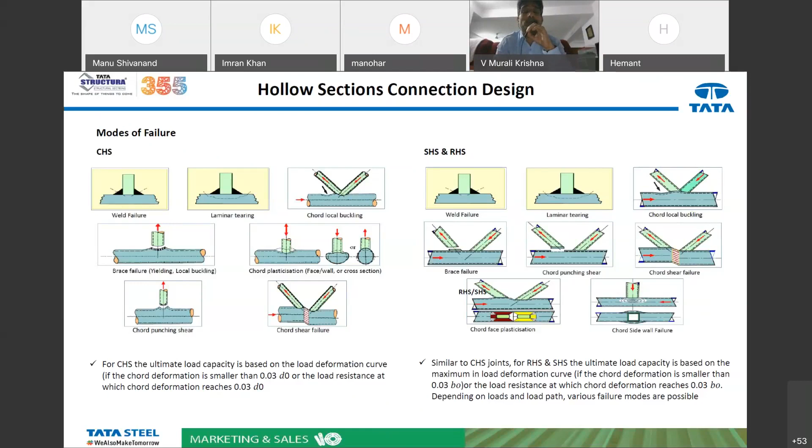Just for general understanding, before that, the guideline tells you what to do, but you should theoretically understand the load path, how the connection behaves. Whenever you are connecting with a plate, for example, one truss is there, the next truss is at 6 meters, another truss is there. If you want to connect at the bottom cord with a strut, you will put a plate perpendicular to the bottom cord on both sides, and bring another hollow section which you bolt or connect.

That's why, while designing the connection, you have to think about where the actual load is coming from and what type of plate, or which weld, you are connecting with. That's why from the member to the weld to the connecting member, that should be the load path.

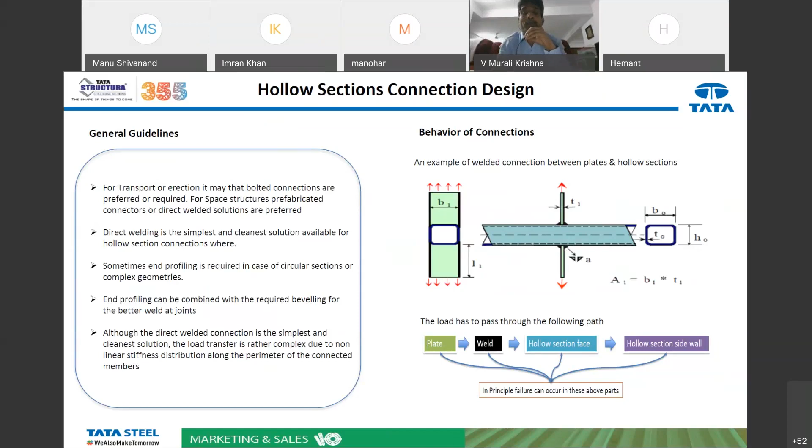Yeah, this is what I would like to tell, and also from the Tata Structura team, what we are going to give you is on concrete filled tubes. We have done a lot of research over the last 1-2 years on how to economize steel as a construction material competitively in housing and commercial projects. Steel is always used for industrial applications, warehouses, or any factory generally, but when it comes to industrial housing and commercial, we still mostly use RC. But to bring the advantage of steel and faster construction, as Manu just touched upon, there is a lot of potential for us as a team.

If we work together, say you have very big hollow sections like 400x400 or 500x500, and you fill that with concrete, that column can take a much higher load than a simple arithmetic sum of concrete load and steel load, because of the confinement action. What happens when you fill a steel tube with concrete? When you apply a load, the load goes to the steel first, the steel column tries to buckle, then it comes in contact with the concrete, and the concrete starts taking the load.

The behavior is different. How does this behavior happen? If you imagine a column of a circular or square tube filled with concrete, and a compression load is applied, what happens? The load first goes to the steel, and the steel starts taking that load and tries to buckle first. Then that buckling is arrested by the concrete core.

When it comes in contact, there will be a small gap in microns. Then the concrete starts obstructing that buckling and the load starts transferring from steel to concrete. Once the concrete starts taking the load, it is simple PCC, plain cement concrete - it will try to come out.

But the steel, having developed a hoop stress kind of action, will not allow the concrete to come out. That is the reason why the capacity of a concrete filled tube is much higher than the simple arithmetic sum of the individual capacities of concrete and steel.

Due to this confinement action of the tube, the concrete strength will reach its ultimate, whereas because concrete and steel work together, composite action will come.

The other advantage is it will give much better ductility required. And the third one is it will enhance your fire resistance capacity.

Fire resistance capacity - I'm not comparing to simple RCC. It will be better than a simple hollow section. If you put a hollow section column, the fire capacity is X, and if you fill it with concrete, it will be X plus some delta X. There is much improvement in fire resistance capacity over a hollow section.

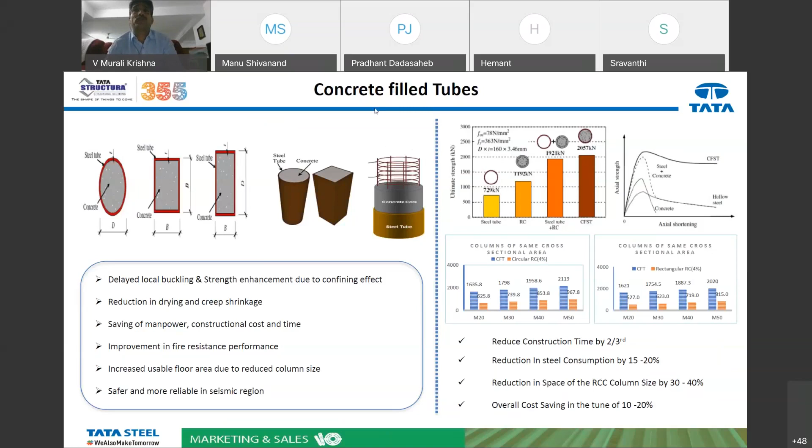Just for your information, I'm telling you this - in the construction segment, whatever the material, along with steel, other advanced materials we are also trying to bring in and provide the service.